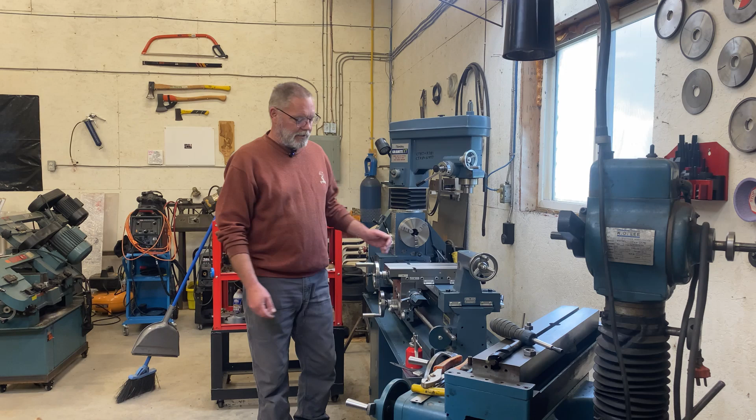Have you ever had one of those lifetimes where something's bugging you, but you're just too lazy to fix it? Well, I don't know if you can tell from the camera view, but this machine is not level. So today we're going to level it up. And while we're at it, we're going to give it a little bit of a lift kit, because honestly, I don't like having to bend over to operate some of the controls on this machine. It's kind of like it was built by 7-year-old girls for 7-year-old girls. So I'm going to fix that up and make it fit me.

The first thing I'm going to do is clean this area up. I've got some chips on the floor, some buckets full of shavings and cuttings. I've got my table here, I'm going to get this out of the way. I'm going to clear this area right out so I can get down and start measuring exactly what I need to do. Now, this is a shitty floor, it's out of level by a ton. I didn't make this floor - I mean, if I had, it would've been shittier. So we're going to fix this area up, get it clean, so we can measure this up and figure out what we're going to do.

Now, if I can only get him to do this in the house.

So I got a few different sizes of high-speed blanks here, 3/16, quarter, and 3/8. I'm just going to see if any of these will make this level, and then I'll know over 48 inches how much slope I have.

So the floor from here to here drops 3/16 of an inch. I'm going to measure what that distance is. And then from here, this way, the floor is doing something different - it's actually, from this point, it's tapering down. So I'm going to do my best to take all this into account when I design my little feet, because I know it's a long shot, but I'm really hoping all 8 of these little pedestals I'm going to build under the frames actually touch the floor.

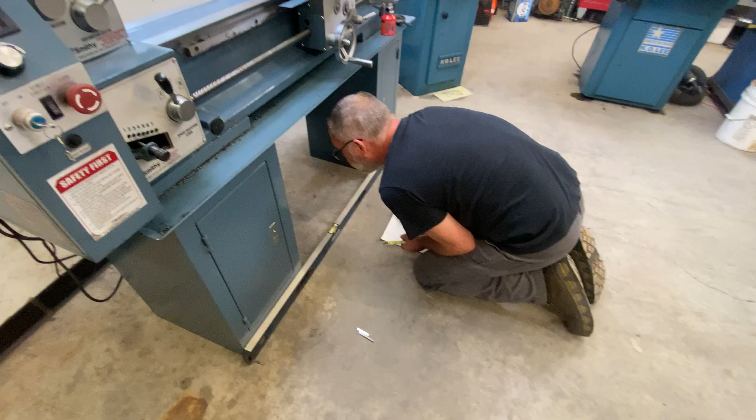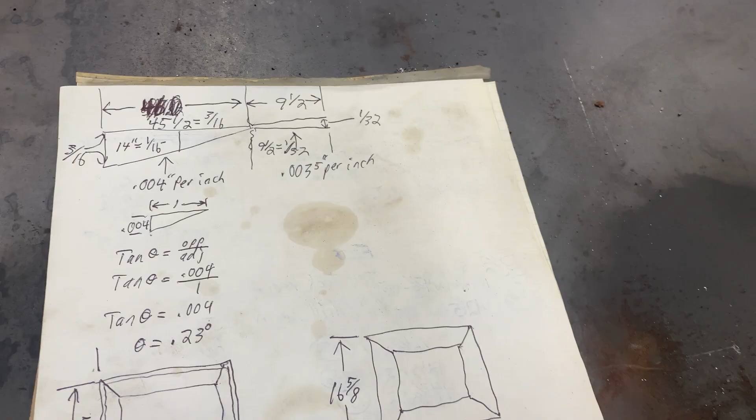So I've got my floor mapped all out and I've done some math. So this is a mess, clearly, but it's quite accurate reasonably. This crack in the floor - and I can show you where that crack is right here - that's the highest point of the floor in this whole area. So that's kind of like our 0. That's where we're going to be adding exactly 2 inches.

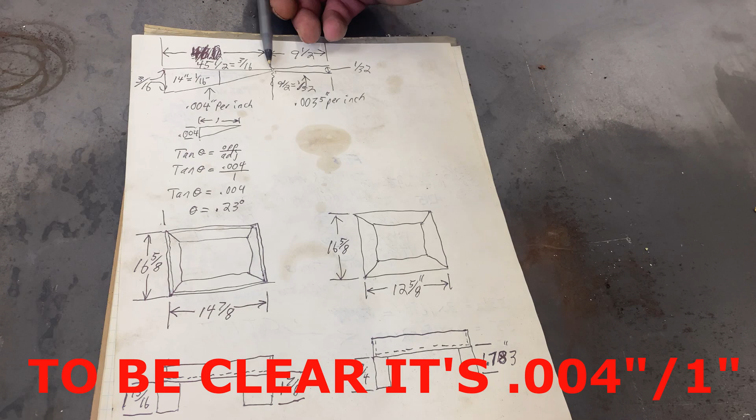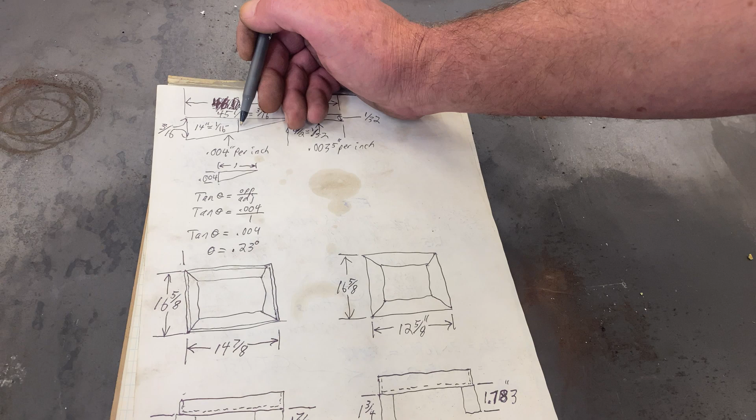So I've done some quick math here, and it turns out that we have 4/1000ths of an inch per inch drop in both directions. And so again, a little more math - by the time I get to this far end of the machine, I need to be 3/16 longer on my leg length. And then on this side of the base, this end of the machine needs to be an 1/8 of an inch longer than the others. This one will be exactly 2, and this will be a 32nd of an inch longer over here than the 2 inch. So here's my frames.

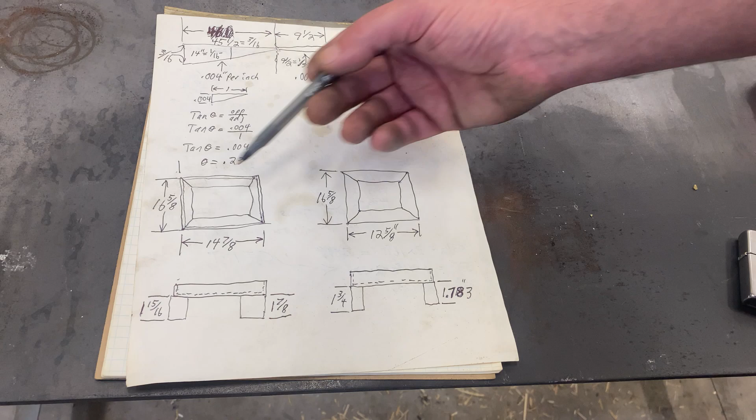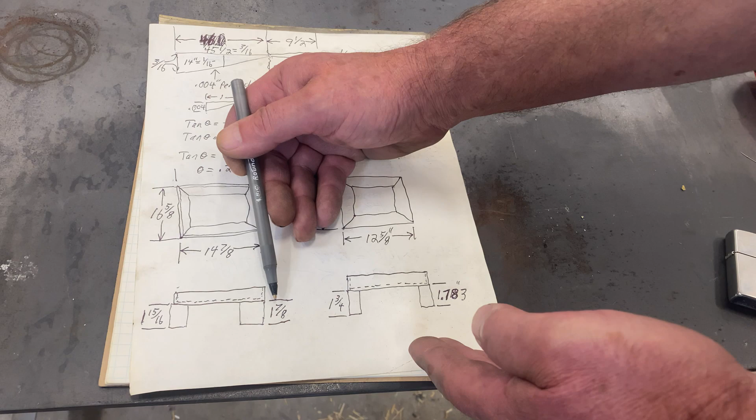I've got some dirty old angle iron that I'm going to clean up a little bit. It'll end up getting painted black, so I'm not too worried about the rust and grossness. This shows the outside dimensions of my little pedestal things, and these are the legs I'm going to cut. Now this is 1/4 inch angle iron, so where I want the 2 inch lift at the crack, this leg will be 1 3/4 long, and then this leg's a little longer because the floor is tapering down. This one will be longer yet, and this one will be, again, longer yet. And then all these surfaces across both of these should be pretty darn close to level.

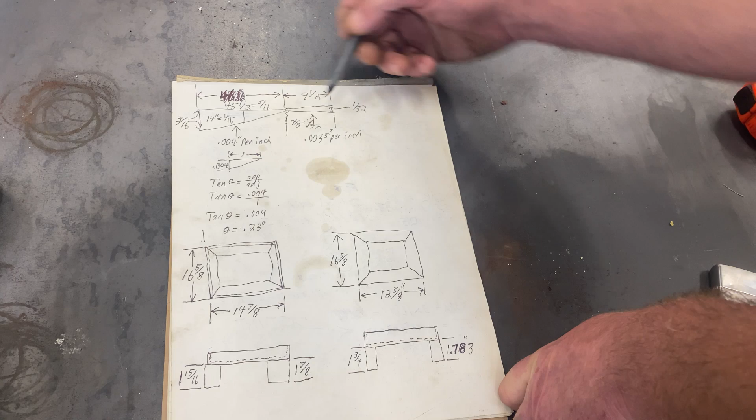Now, I did do the math, and I was thinking at first maybe I'd set the saw up to cut whatever angle I needed. Well, the angle across here is actually less than 1/4 of a degree. So I can't reliably set the saw up to less than 1/4 of a degree, and even tracking which piece is which would be troublesome. So I'm just going to cut them all flat as I can, and I'll hope that the whole machine sits on all 8 points at one time. So anyways, long story short, my goal is for the machine to sit on as many of these 8 different points as possible, all at the same time.

I've also made these frames probably about a 1/4 inch bigger on the ID than the machine pedestals are on the OD, just to allow for any out-of-squareness, either by me or by Smithy, and a little wiggle room to allow me to actually get this thing into place.

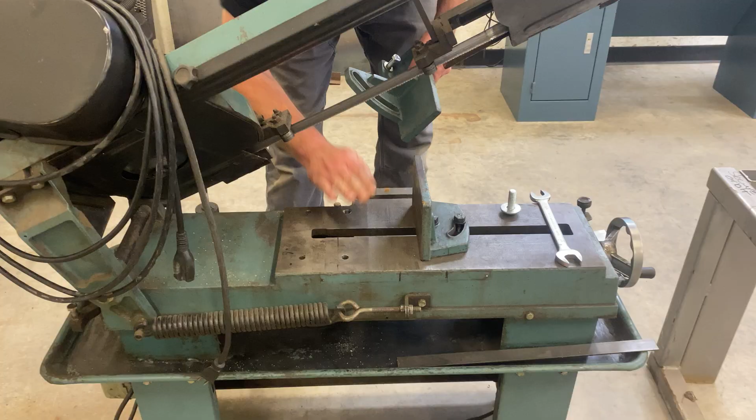Now this machine actually didn't come with a second set of holes. That's this set back here. It came with these holes only for mounting this side of the vise. And this saw is over 30 years old. Somewhere along the way I stripped this hole out, so you can see I've made and put a threaded bushing inside this hole.

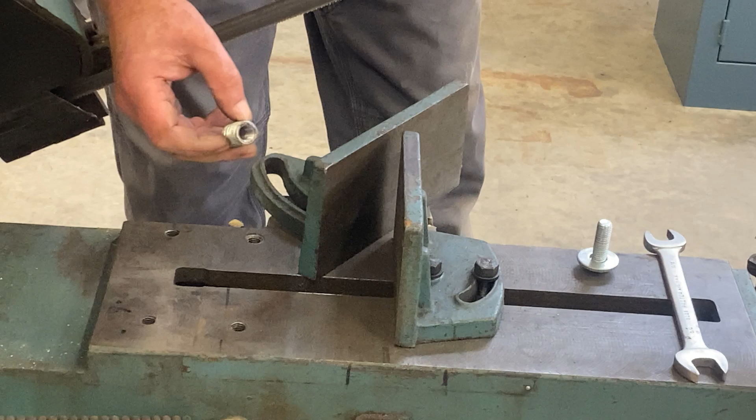So good for years to come. Here's a second threaded bushing that I made while I was making this one anyhow. I was all set up to do it, and I thought, well, next time a hole strips, I'll be all ready to fix it.

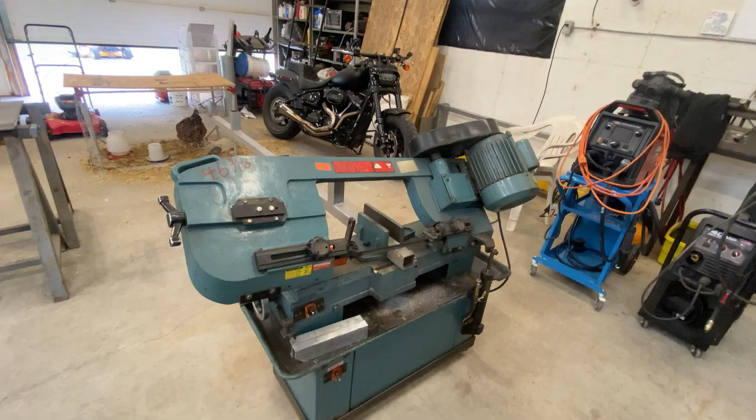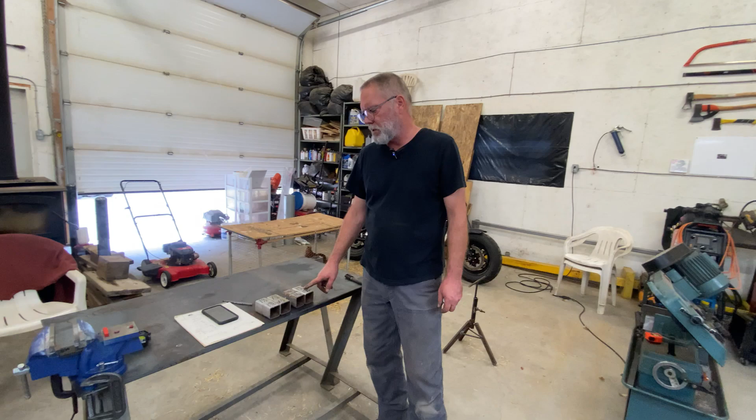So there's all our feet cut up. I'm going to move on now to cutting the angle iron up for the frames of these things. These will be on the tailstock pedestal of the machine, outer and inner, and this is the headstock end of the machine, outer and inner.

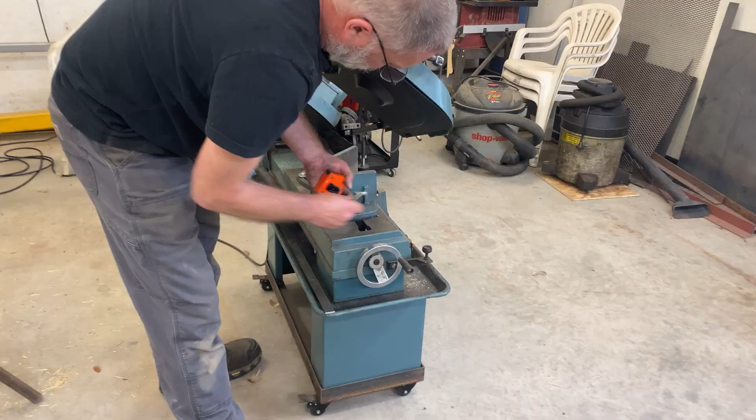So I'm mitering the corner of this angle iron frame, so I'm just setting my saw up to 45 degrees now.

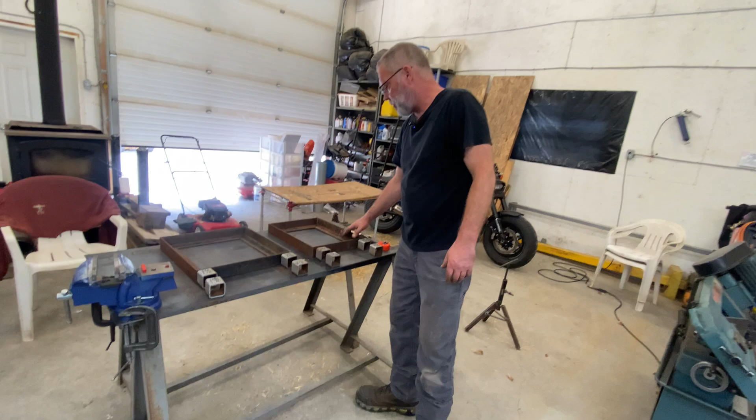So there's all the pieces for my tailstock frame, and it's 4 feet, and my headstock frame, and it's 4 feet. All those pieces are cut up.

Now I'm gonna do a weld on the bottom side of these seams and on the outside of these seams. And I'm gonna leave the inside flat so the lathe can sit as flat as possible in there. And then on the bottom side of these seams, I'll weld bevel them first off, and then if there's any weld sticking up, I'll grind it down flush so the feet can sit as flat as possible.

Now this angle iron's filthy old, you know, rusty old angle iron. I don't really care, it's still strong. There's lots of proper meat still inside of it, but I'm gonna take this outside. It's a nice late summer day. I'm gonna do all my grinding and weld prep and deburring outside, just so I don't make a huge mess in here for no good reason and have to breathe all that in.

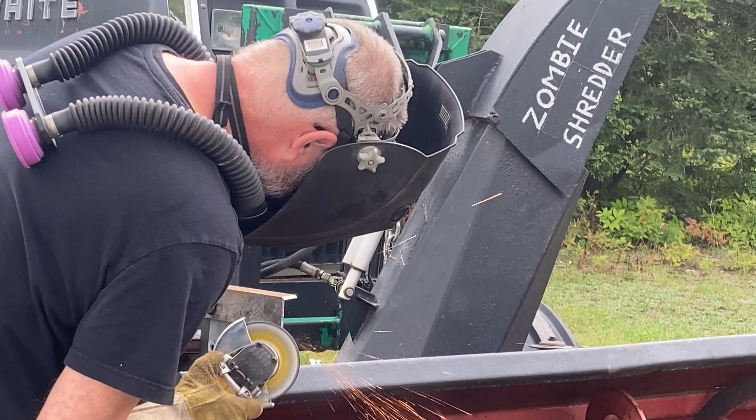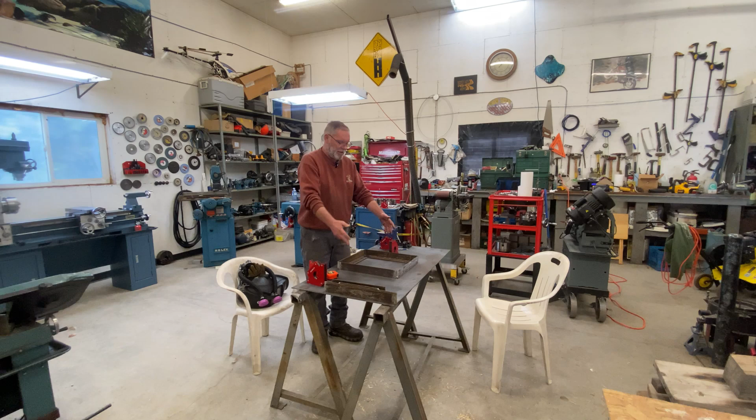So you guys see me working here all the time. I'm gonna use some air quotes and call this my welding table. But it really sucks. It's not a welding table. It's a pair of sawhorses with a piece of 3/16 plate sitting on top. The plate isn't especially flat. There's no way to clamp anything anywhere. This really is not a welding table, although, you know, you've seen me weld here, you've seen me solder here.

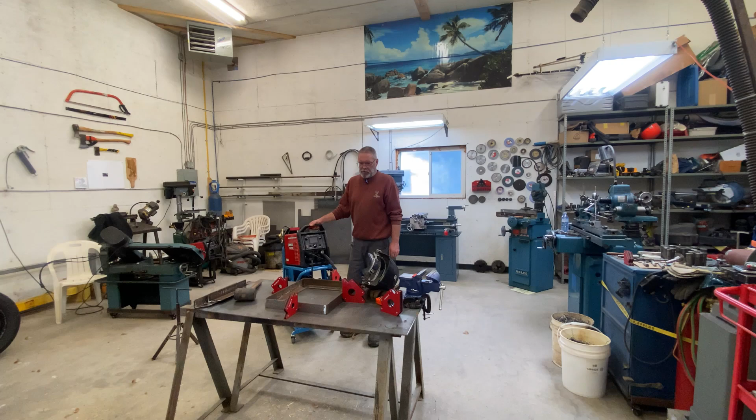You guys have seen, this is where we set different things up to display them. And I'm seriously considering getting myself a real welding table. So I've got my first one set up. Yeah, it was painful, but it's plenty close enough to square and it'll fit.

So I'm just gonna tack it up on the inside. Then again, I'm gonna flip it over. I'm gonna do all the real welding from the outside. So I'll probably tack in 4 places on the inside, at all the corners. Flip it over, do some tacking on the outside, and then weld her up on the outside.

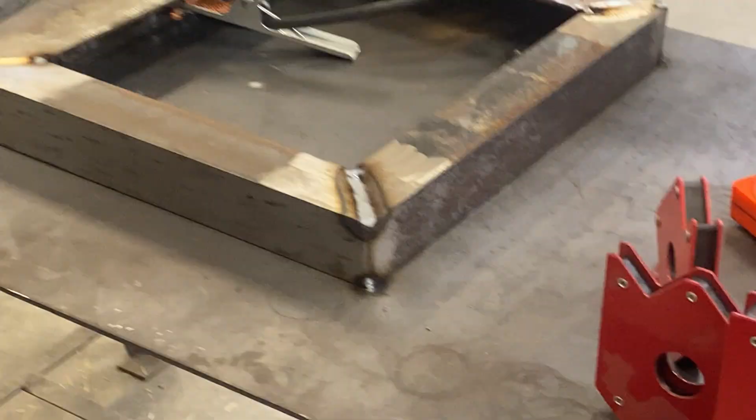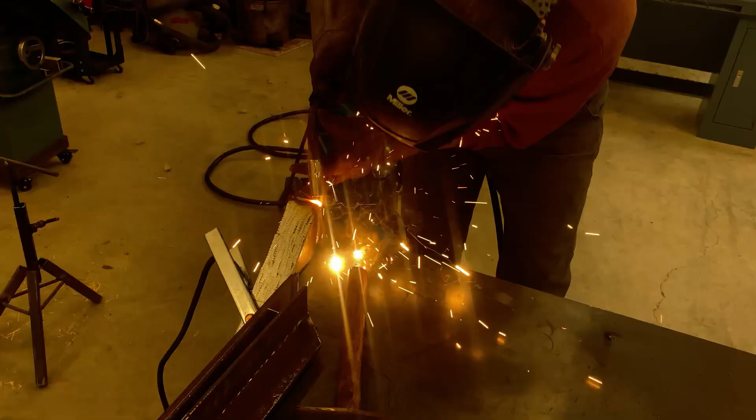Well, I've got both frames welded up. I just brought it back outside where the air is nice and fresh. I'm just grinding down the very tops of the welds where they stick up where I want to put the feet on. Now, I did weld bevel all these edges, so there's going to be plenty of weld left. I just need to take the high spots off so that my feet sit nice and flat.

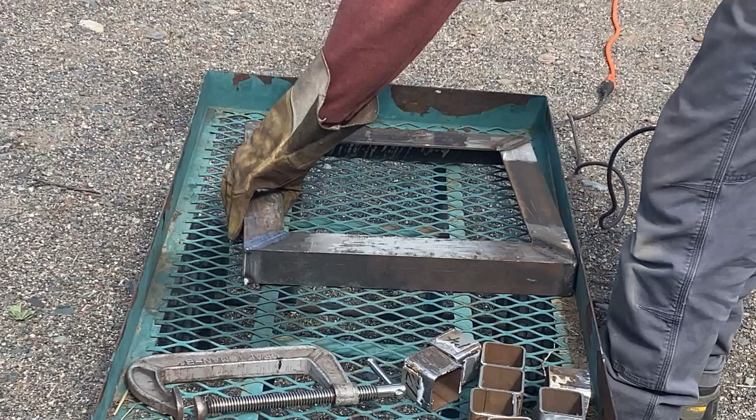Frames are all welded up, ground flat, and I smoothed them all out. They're good to go. Now I'm going to put the feet on.

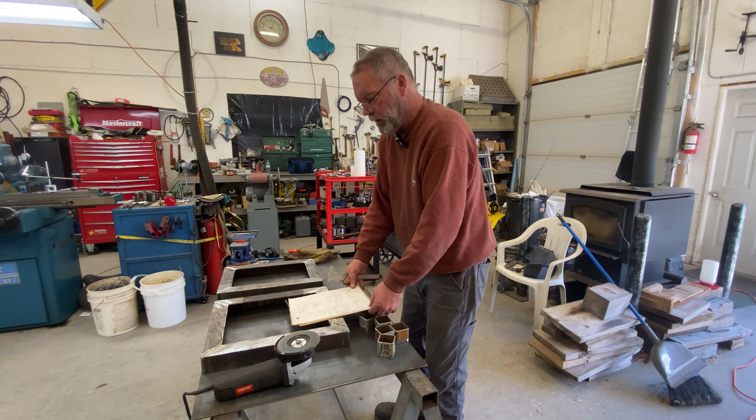So it's super important that I put the right feet in the right place because of all that taper on the floor that we talked about. So I've got my headstock frame here, my tailstock end frame here. I've got my map in front of me of the floor and how it was laid out. And I've got a picture here of where I need everything to be.

Now, when I actually install this, they're going to be flipped upside down, but these will be the same as each other, these will be the same as each other, these will be the same, and so on. And so that won't affect anything. So I'm just making good and sure I get the right one in the right place.

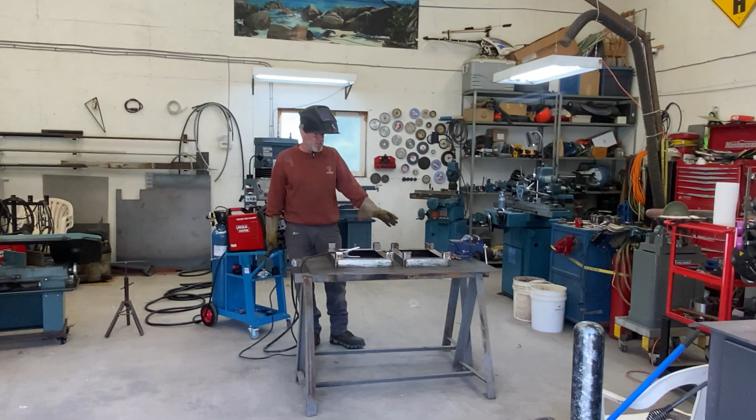I've got all my feet in the proper place now. Just so I don't lose that, I'm going to position them all, tack them all, then I'll come back and weld them all.

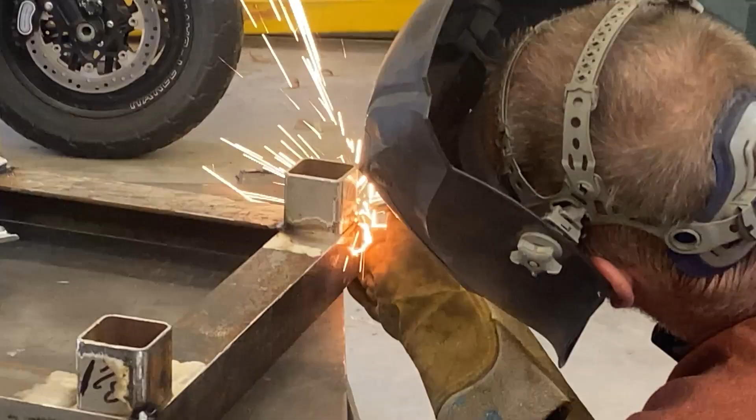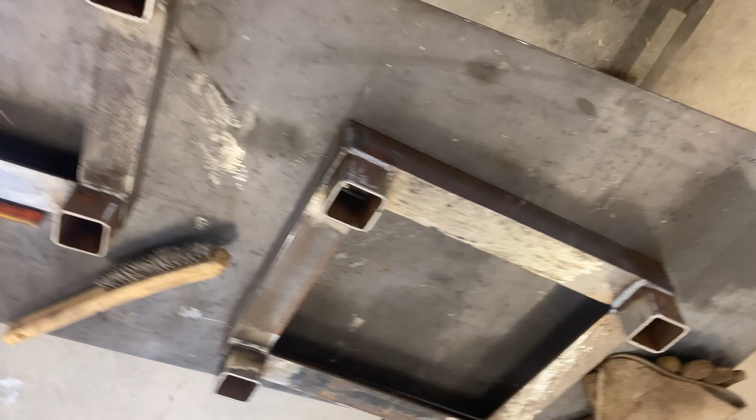So there we have it. I have these all welded up. I'm gonna let them cool down for a minute. Now, as I say in all my videos, I'm not a welder, so apologies to you guys that actually know what you're doing for having to watch me butcher things like this. But inevitably, welding comes up in many of our projects, so hey, I'm getting better.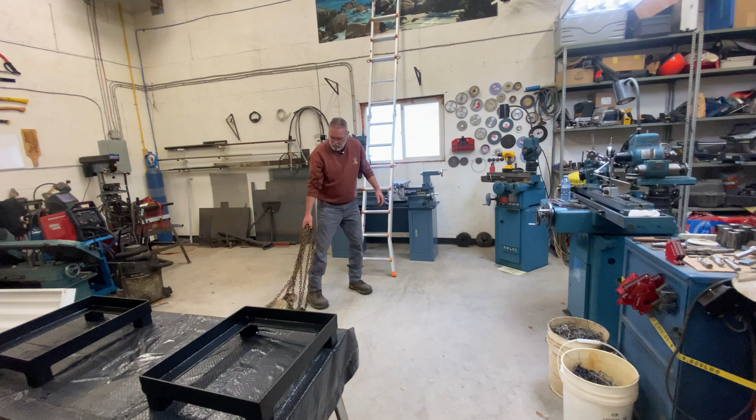I've got this chain fall, weighs an awful lot, way more than I am prepared to carry up this ladder. So first I'm going to attach a block to that loop up there, and I'm going to hoist this up with a rope, and then I'll just go up there and hook it on.

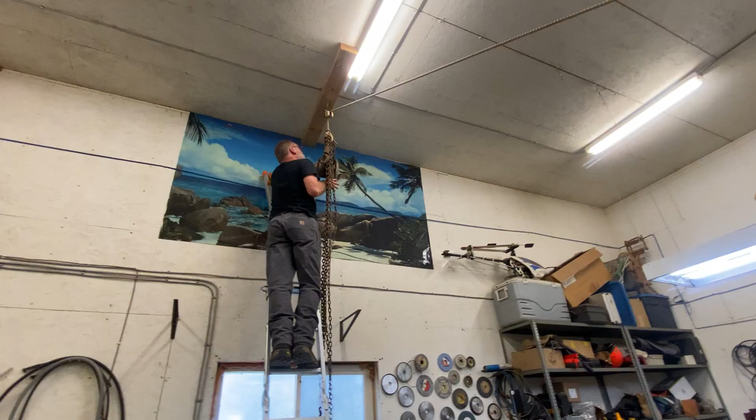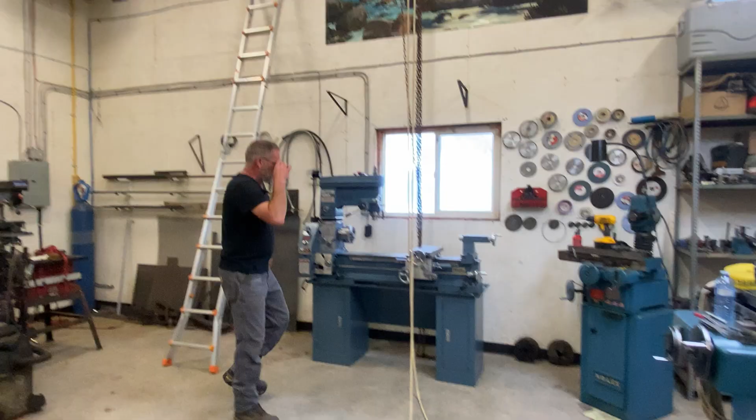So this lathe has built-in lifting points. These 4 pins just slide out. So that's what we're going to lift off of.

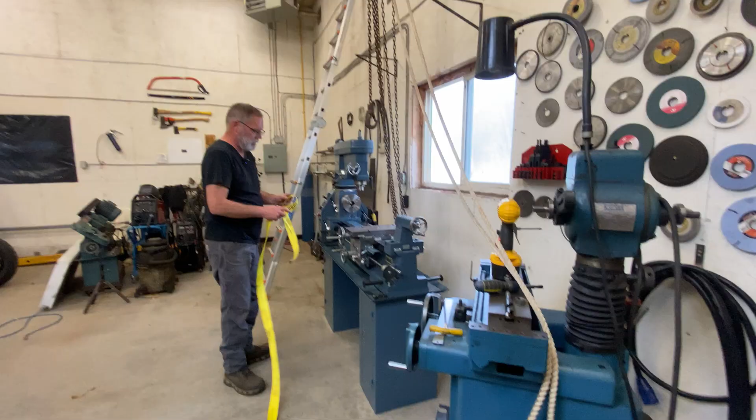Ooh, fancy knot. Bowline. Handiest knot ever.

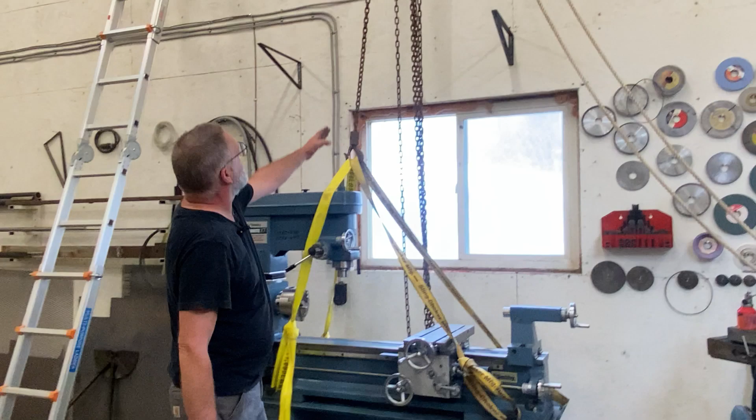So when I put that lifting point there, I just kind of picked the place that roughly I thought I would want this machine to be. And turns out I didn't exactly want it there. So you can see this lifting chain's on a bit of an angle, which is fine. But what I do have to do so that the lathe doesn't go swinging over this way is I have to secure it to that wall. So you can see I've got a couple hooks over here with a ratchet strap.

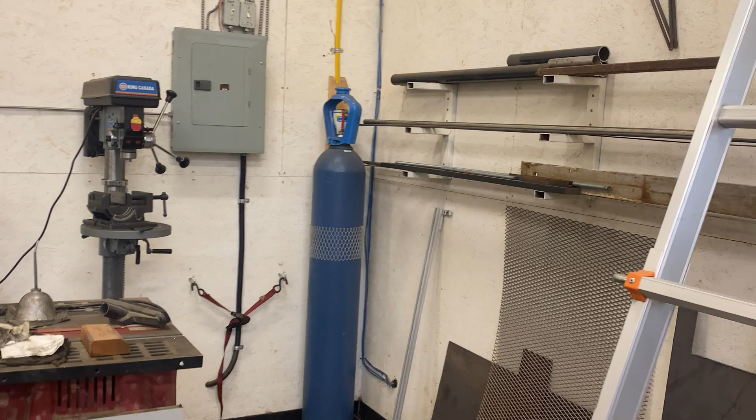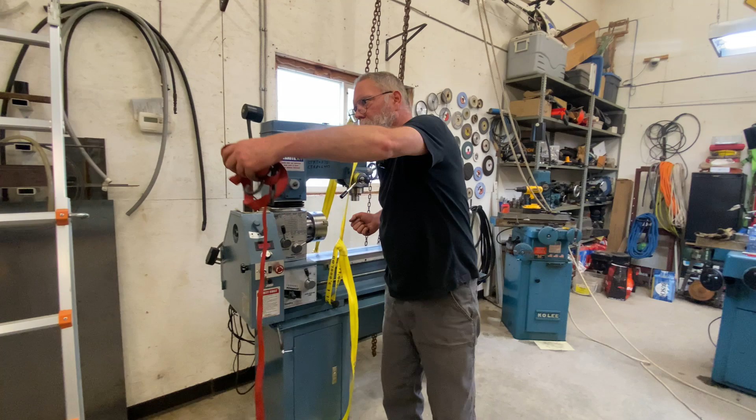And I've got some C-clamps on here. I'm going to make another little harness with this ratchet strap, and then I'm going to use a third ratchet strap to pull against those 2 points, and that'll maintain the lathe's position this way as we lift it off the floor.

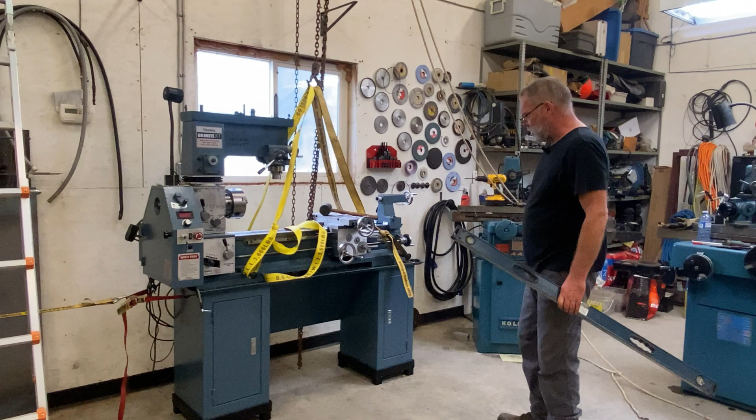Nice and level. The height's much nicer working height. I'm happy with that. Just need to do a little fine tuning and shimming under some of these feet because all 8 of these feet aren't doing equal work. So just going to do a little shimming.

So I'm just cutting out a little strip of this pretty thin aluminum, somewhere in the neighborhood of 20 thou. The feet are 2-inch square, so I've got a 2 1/4 inch wide strip, and I'm going to cut it into 2 1/4 inch long pieces, and those will be my shims, so I can hopefully get close to all 8 of those feet doing the same amount of work.

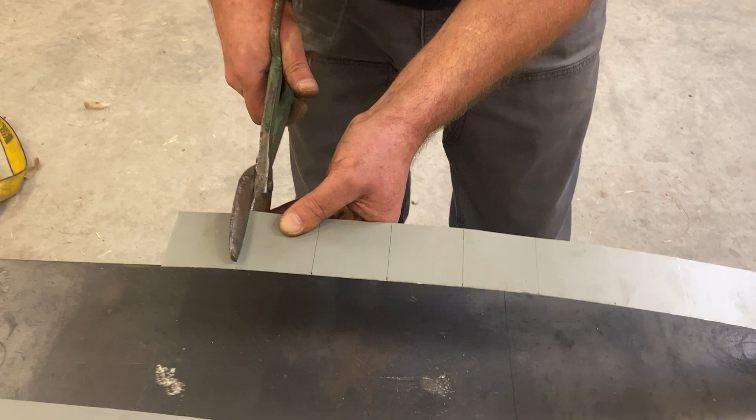So I'm just going around with my pry bar here, finding the ones that need a little shimming. That's a lot better already. Yeah, got that all shimmed. That's mint. Oh, that's rock solid. Now I'm gonna check the headstock end, and we'll see how she is.

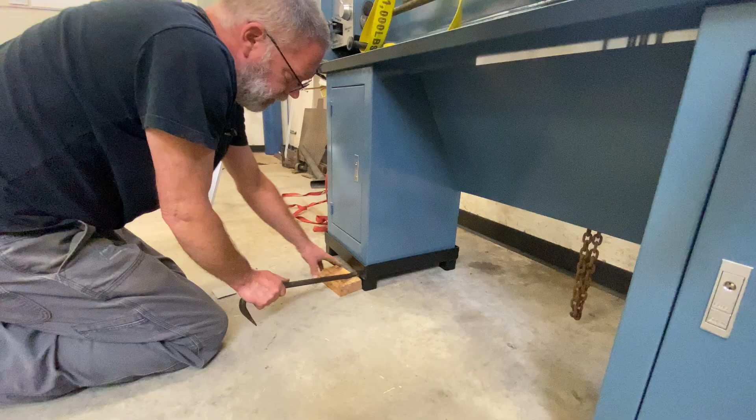Yeah, well, I was done with this strap that was holding it to the wall, so I just peeled that out of there. And I'm just seeing if any of these feet need a shim under them so that this thing sits nice and flat. Oh yeah, mint. Okay. Can peel all this rigging off here now.

So I just have to get that chain fall back down from there, and we can call it good.

I hate that ladder. It scares the hell out of me. It's a little sketchy. Yep.

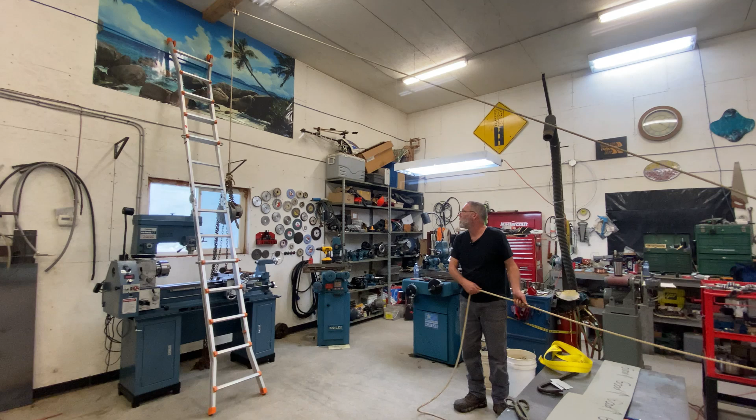At the end of your rope, so to speak.

Well, it's time for me to put my fluorescent light fixture back up over there. It's heavy, on the heavy side I would say, and it's kind of awkward. But anyways, here goes.

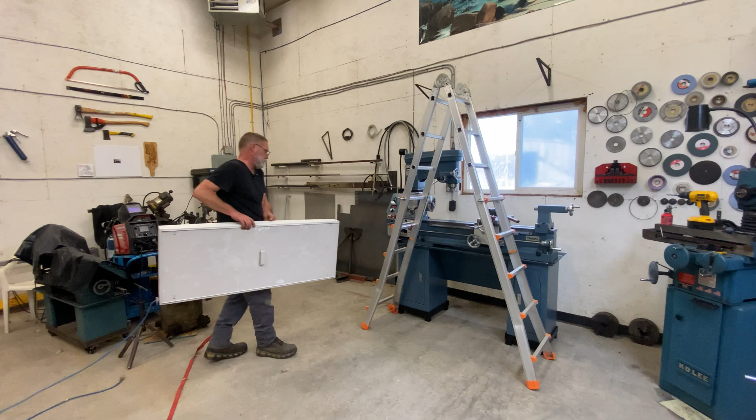Someone's flying low. Mm-hmm.

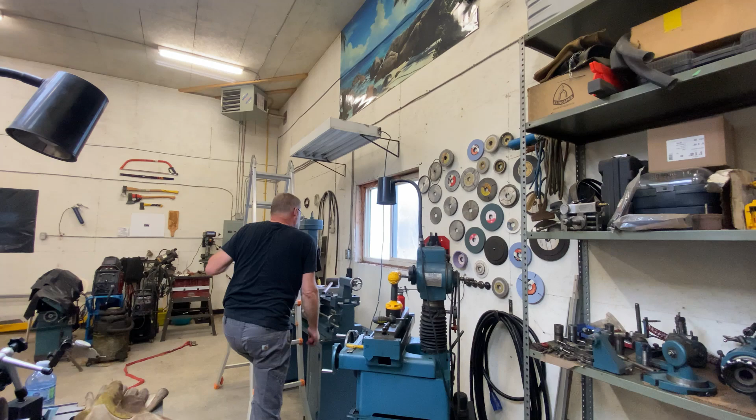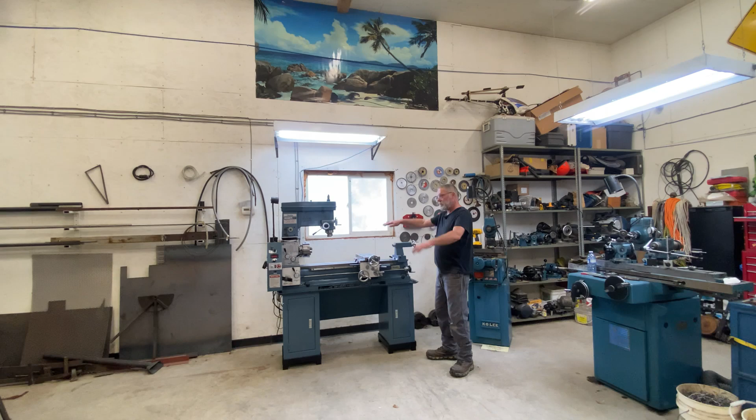Well, we're all back together now, and I couldn't be happier. It used to drive me nuts. I'd walk through the door and just look at this thing sitting there on an angle. It was driving me insane. That shimming, now it's super sturdy. Handles are much more comfortable height to work at, and yeah, I'm gonna call that a big success.